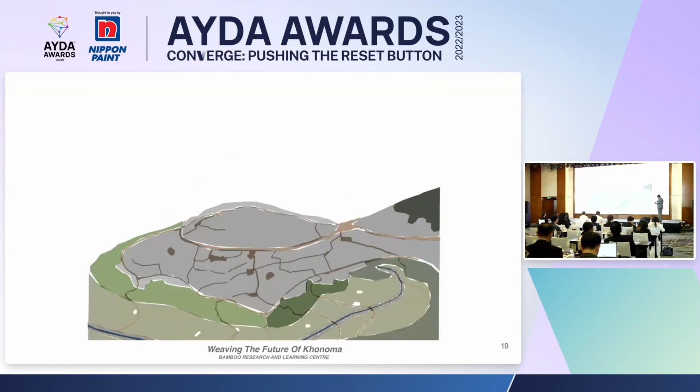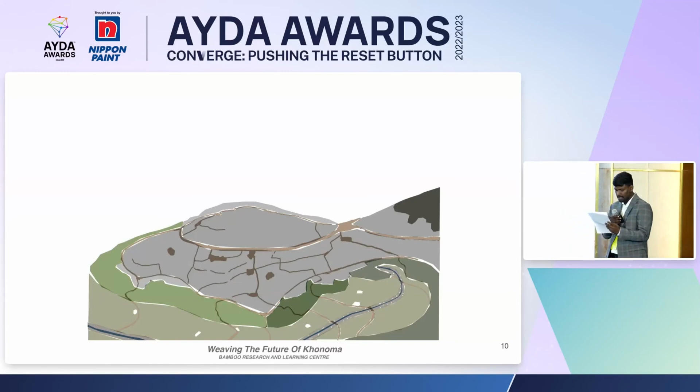Here is the story of the Angami tribe from hunting to farming. Hunting was once considered sacred and a significant way of life. Tragopan is the state bird of Nagaland. In the early 1990s, the people of Khonoma killed around 300 tragopans in just 1 week as part of a hunting competition. At that time, tragopans were on the verge of extinction.

That's when certain villagers and elders got concerned about wildlife in Khonoma, and they started to create awareness about the significance of protecting wildlife. Almost all families were into hunting before the ban was imposed, whereas around 20 to 30 households were dependent on it. However, now almost everyone has shifted to farming and other activities like basket and shawl weaving, and ecotourism.

Although there are reports of hunting still taking place on a much smaller scale, Khonoma is all set in its fight for conservation. After becoming a green village, it attracted many outsiders to witness its beauty, and the need for hospitality increased, and all the equations started changing.

Meet my friend Vico Sato, who is a tourist guide as well as a cane basket weaver. He told me about the challenges faced by the new generation, increase in population pushing youth to the cities. There is no particular job that can sustain their whole family. His father thinks oppositely, that youth is diverted because they don't know the value of this land. They need to get merged into the context, so basically they have enough resources to generate a self-sustainable cycle.

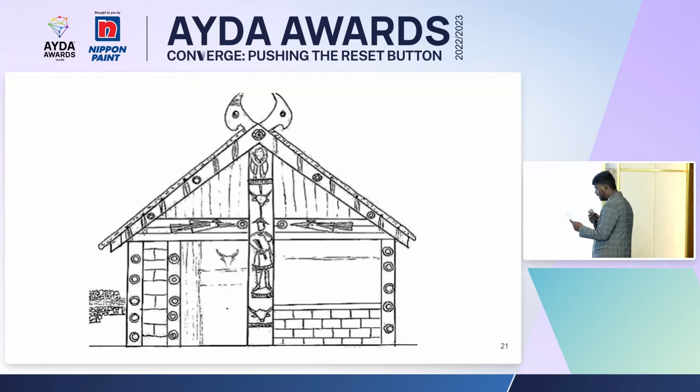This is the documentation. Form follows function, but here, form follows climate. I have documented some existing building structures, Naga houses and morungs, a place to stay for boy soldiers, and their traditional houses, which were a great example of how space syntax responded to the planning and construction of the structure. Considering the building material, they used to build modular houses with common measurements finalized by anthropometry.

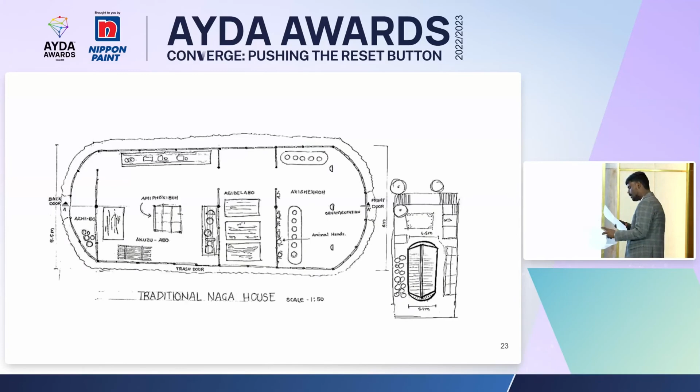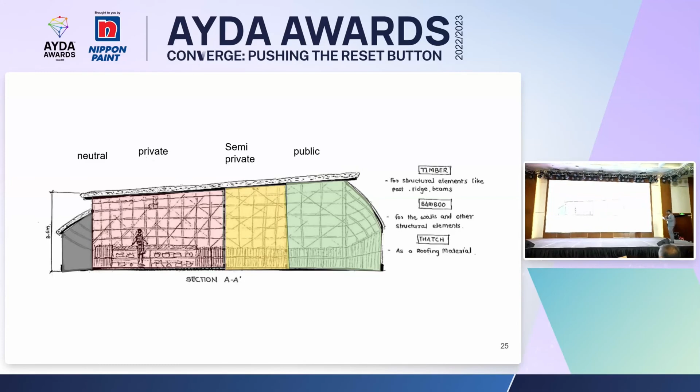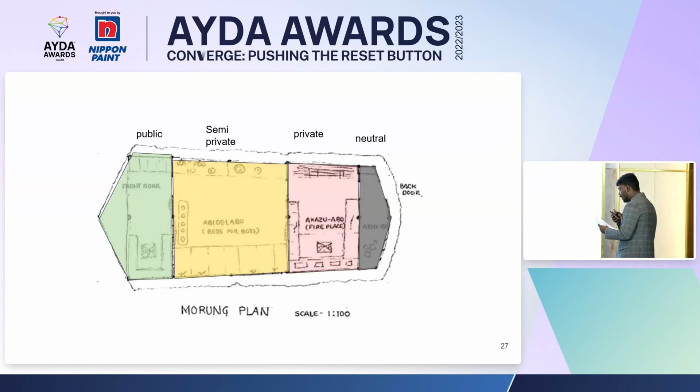Space was usually divided into the entrance porch with the weaving area and the fireplace, followed by the central living space that culminates into the kitchen and storage. A simple linear flow of spaces was enclosed by timber and bamboo beams and columns, surrounded by other houses and morungs. One cluster is formed by binding these houses and morungs with a central open multipurpose space.

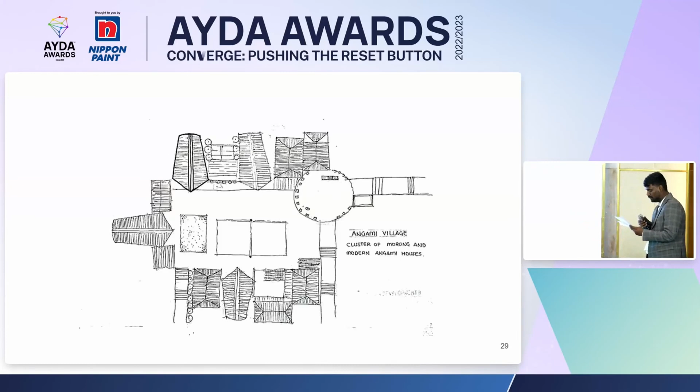Many of such living clusters form a village which merges into nature as we go down. Everything starts with nature, like this water stream, surrounded by beautiful paddy fields enclosed in rainforest. The top parts mainly have alder trees. These alder trees are not cut but pollarded, yielding wood for fuel and light construction. Then comes bamboo plantations, and then come the societies called khel. This is the top khel, then comes the middle khel, and then comes the lower khel.

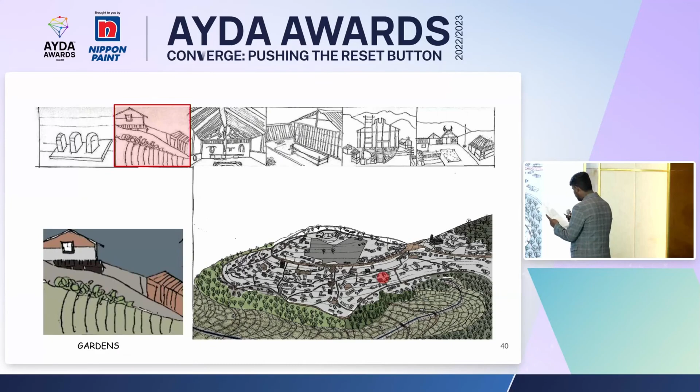The village has pathways from every house that culminate in the farmland. Village life is closely linked with nature. Agriculture is organic, and people mostly practice terrace farming, with rice being the main crop cultivated in the village. Alder trees perform the task of nitrogen fixing. After the fallow period, the plots are cultivated again.

Each family also has a shifting cultivation or jhum plot at the edge of the forest. Here a variety of crops is grown, such as soybeans, garlic, ginger, chilies, and other vegetables along the alder trees. The jhum plots are cultivated for 2 to 3 consecutive years, and then left fallow for 3 to 4 years to regenerate naturally. Wood is the primary fuel used in homes.

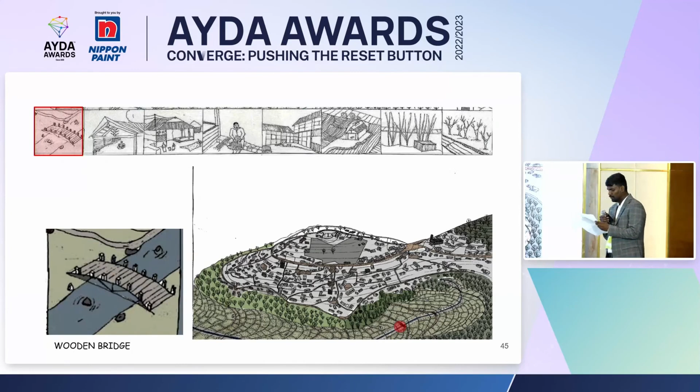It is common to see stockpiles of wood in the village. A fixed amount of wood is permitted to each family for its annual needs, and no felling or commercial logging is allowed beyond this.

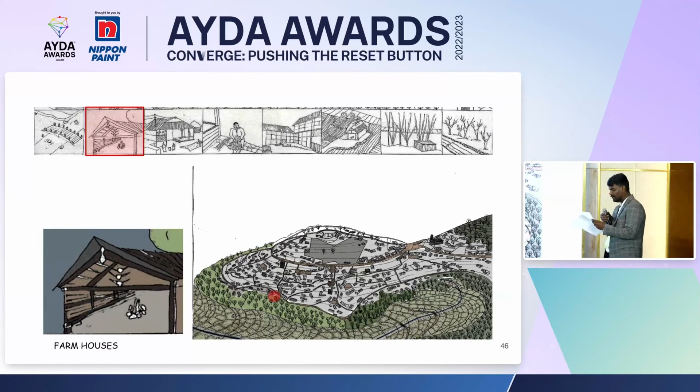Hunting has traditionally been a very much part of Naga way of life. It was a radical step for the village council to ban hunting. Homes and community houses are still decorated with trophies, considered a symbol of valor and skill.

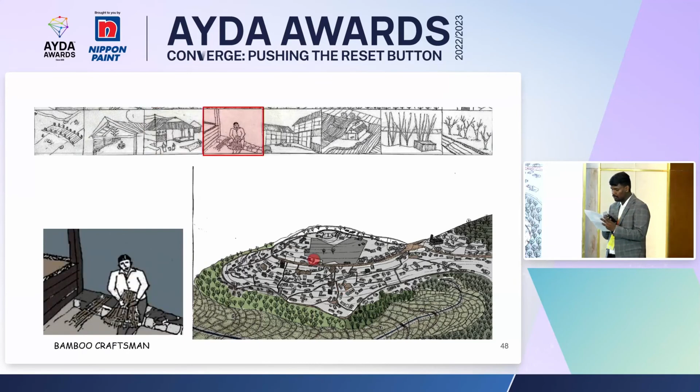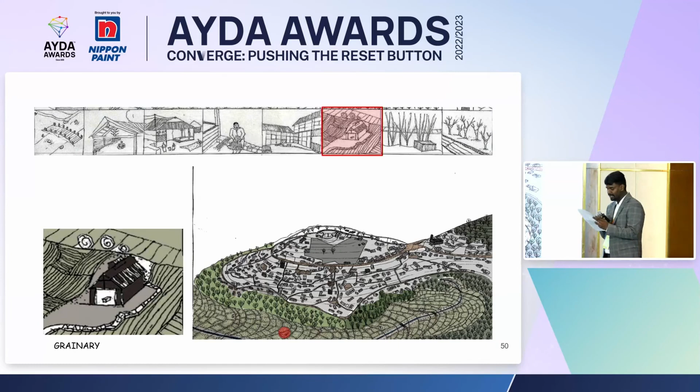Once constructed of mud and timber, village homes are now mostly made up of brick and concrete with tin roofs. However, local natural material like bamboo continues to be used for smaller purposes. Skilled artisans make fine baskets sitting at home.

Living and working spaces are not demarcated. There is always a rhythm of family life around the craftsman. Tools made with traditional technology are used to cut bamboo.

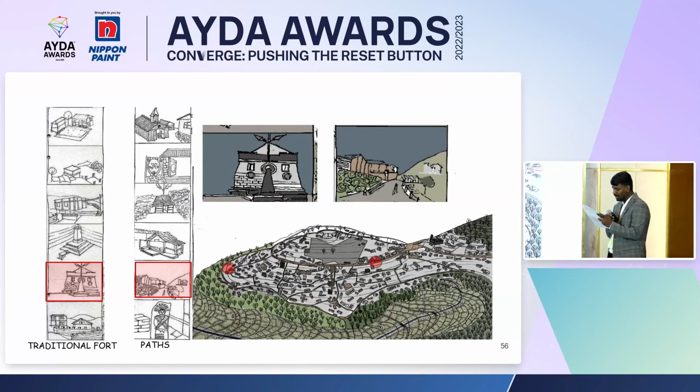The Angamis are known for their superlative basketry skills. Local cane and bamboo gathered from the forest and around the fields are the raw materials used. The ban on timber made it a green village, but it snatched away its heritage values.

Nagaland, and especially Khonoma, is blessed with natural assets like bamboo. It sits comfortable and cozy around the green backdrop of the rich bamboo plantation.

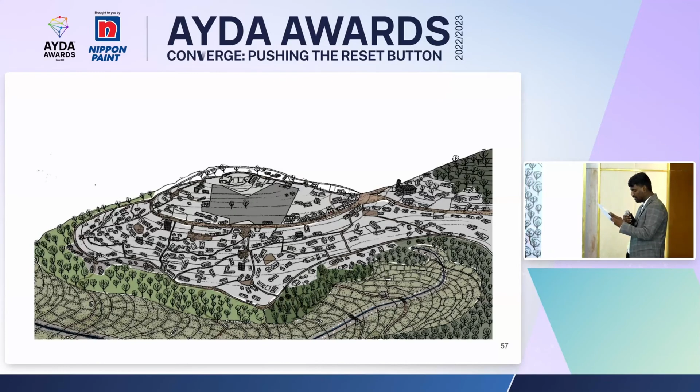While documenting the community, for new structures coming up, bamboo is only used for aesthetic purposes, while concrete and brick are used for structural purposes. Knowledge of using bamboo structures is fading away with time.

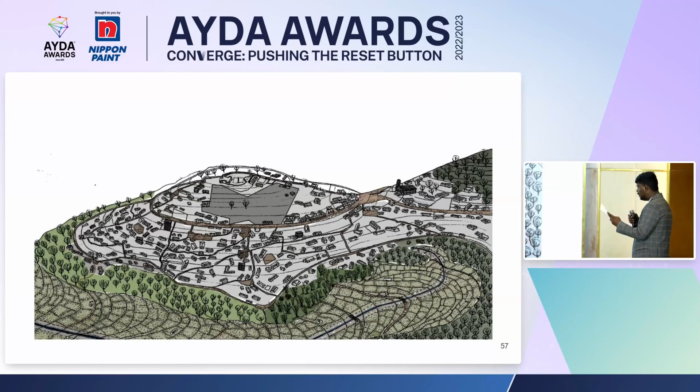Adapting to new technology, the community is neglecting bamboo as a natural response to its microclimate, while bricks and concrete create damp conditions. Present day flat roof constructions are creating leakage problems, which is not an ideal response to the amount of rainfall the area witnesses.

The concern I had regarding Khonoma's return to bamboo increased after seeing this scenario, which is the reason I proposed the Insert Bamboo Learning and Research Center. The aim of the Insert is to encourage locals to identify the potential of bamboo and practice their weaving skills.

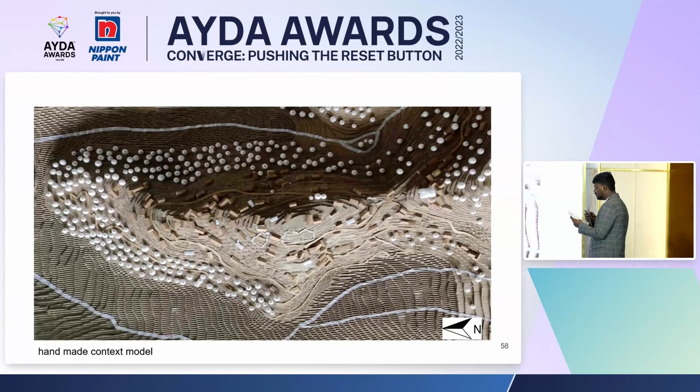It stands testimony to the traditional building technology and form. The villagers will teach tourists how to weave the basket, and bamboo experts around the world will teach them construction techniques. Overall planning.

Planning follows the contour lines, and hence the clusters simply sit together the way the site allows. The pathways are perforating through the whole site, connecting to the village road network. To follow that rhythm, every design structure also has a staircase that opens up on the ground and leads to the farmlands without disturbing the previous planning.

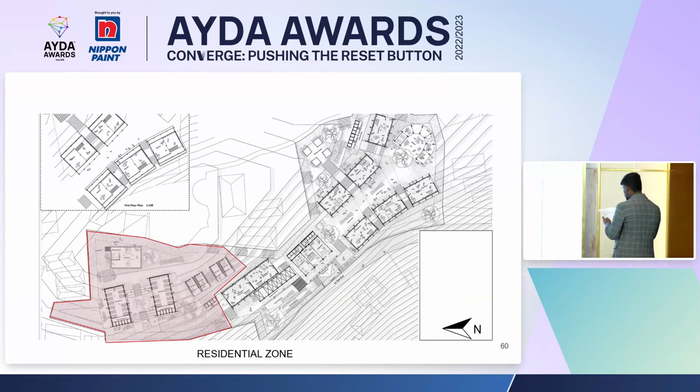The left side of the site holds all the living spaces and the dormitories, while the central place has a primary school, acting as a nucleus of the Insert where every child learns about their culture and community just by being present in that structure.

The right side of the site holds the workshop areas. The Insert ultimately merges with the surrounding and becomes one entity for the community. It is, in true sense, capturing the spirit of the place.

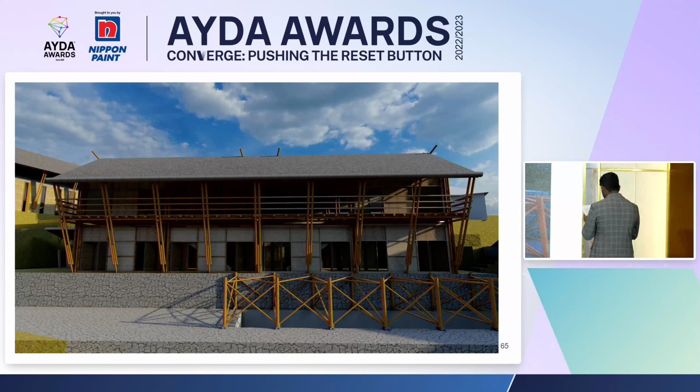Taking cues from traditional building techniques and planning, I designed a module that replaced timber roofing with bamboo. The dynamic structure of the canteen shows modern bamboo construction. Open-to-sky spaces are used for various purposes, from festivals to small activities. The bamboo treatment plant sits just after the construction workshop.

So we come to the module. Taking into consideration the earthquake zone, I designed the body of the house with wattle and daub construction with bamboo as reinforcement. It ensured the home's stability and sustainability.

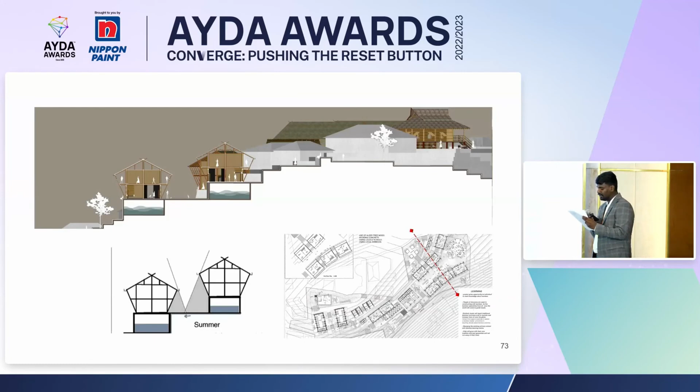As the village sits on a hilltop, the irony of heavy rainfall and scarcity of water is emphasized. Using solid stone for waterproofing, the footing underneath the structure will act as a water tank, which could be a wise solution to the problem.

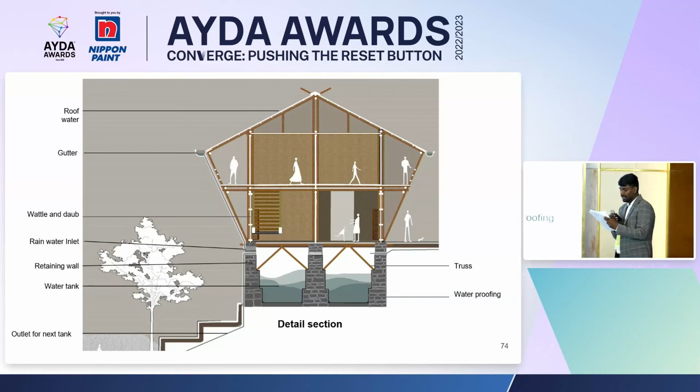Standing on the solid stone footing, the structure goes up to ground plus one story high. The vertical division of spaces is such that the entire ground floor is given to workshops that have a natural spillover space from the surrounding plinth.

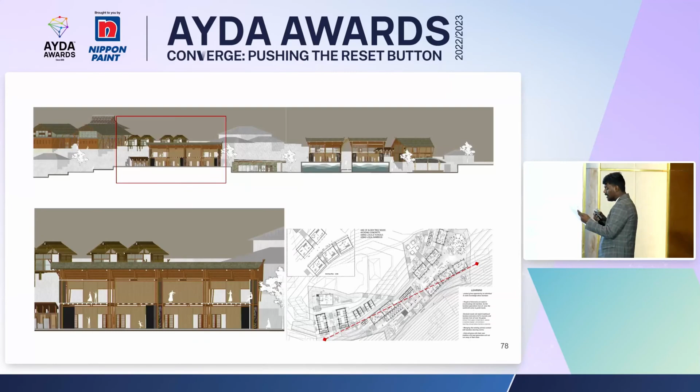The upper floor is dedicated to the research and learning areas, with a separate entry and narrow passages which are internally linked. The structure stands alone since connecting pathways could be compromised during an earthquake. These modular blocks can easily be built by the local community. The Insert is something which is of the people, for the people, and by the people.

So this is the detail of the clusters.

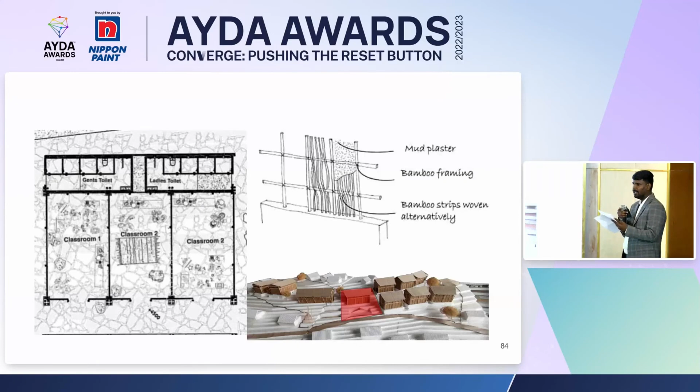For the construction of bamboo, we can use multiple methods to bind it. One is by pegs, one is by tying it, and one is by steel bolts. It depends on the condition where it's standing.

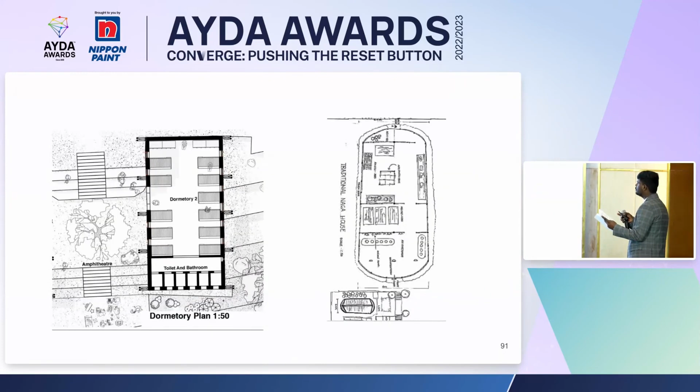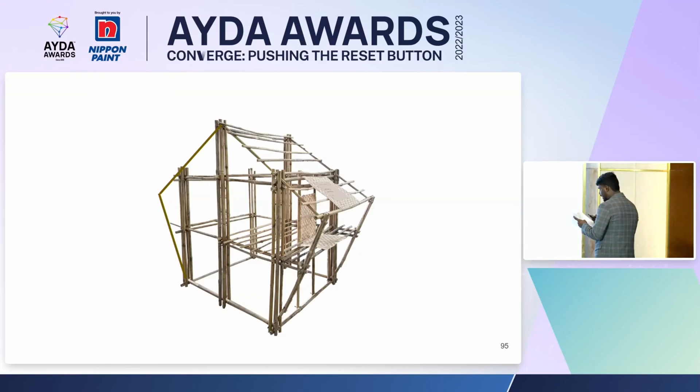in many natural calamities. So at last, the higher the buildings, the lower the morals.

At the end, I'll say we together should start a bamboo movement and avoid incidents like Joshimath in Uttarakhand, floods in Pakistan, earthquake in Haiti, and many other incidents like that, and save our tribal and rural communities and their culture throughout the world.